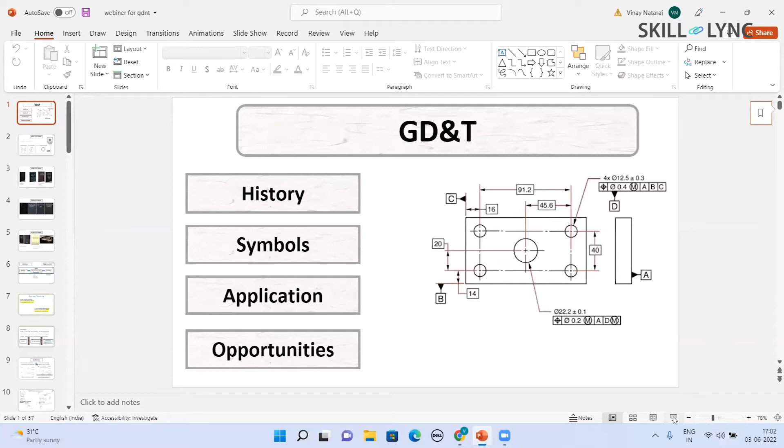Okay, let me just try to share my screen. I hope all of you can see my screen and hear my voice, right? Any issues in the voice, please? Yes, we can see your screen. Yeah. Any voice from the participants? Nope. Okay. So I will try to continue.

Today's session is called GD&T. So here, what we are trying to see is how it has evolved and how important it is, and how basically it is necessary for us to know about what is GD&T in our daily life, professional life as engineers of any field.

Okay. So in the first slide, I would like to mention that we will try to go through the history. History is very important because it gives us the depth of the evolution and the importance of the subject. And then afterwards, we'll try to learn about some of the symbols, and then we'll try to put up the application.

Somebody is telling it's not audible. Is it audible, sir, now? So my mic is not on mute. Vinay, you are audible. Yeah.

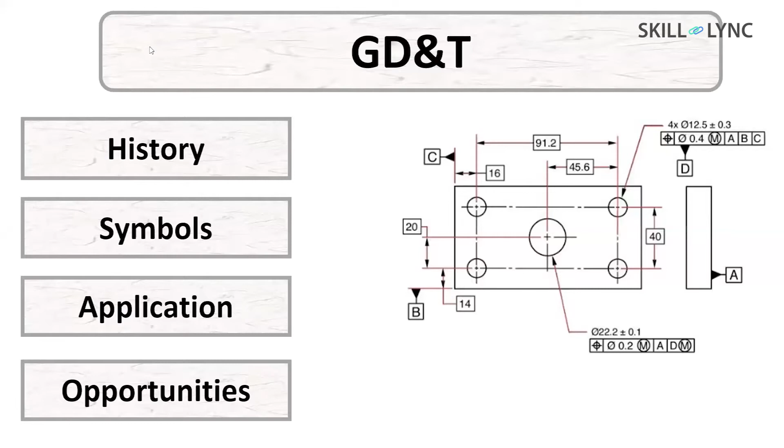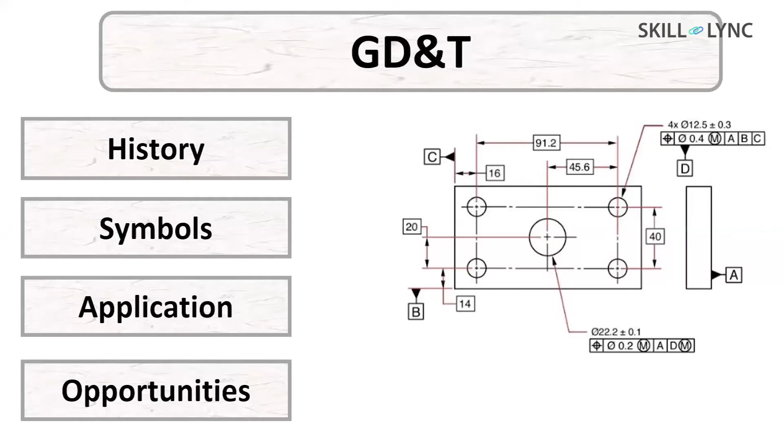Yes. So let's go and know what is GD&T. Let's go into the history first. So way back in 1939, which is when we had the Second World War also, a person named Stanley Parker was known to be responsible for starting off GD&T. He was working in the Royal Naval Torpedo Factory in Scotland in 1939.

So what is this torpedo factory? Torpedo means it is a kind of a missile which can be launched from a submarine or a ship for underwater. It propels itself. At that point of time, war was going on, and he was trying to manufacture lots and lots, in millions, and he had to supply them for every day of use on the battlefield.

But when he tried to manufacture this, and it was getting checked for dimensions and other things, he found that about 30% were rejected, and only 70% was accepted at that point of time. So he was wondering, because whatever is rejected is just sitting on the floor, and there was a huge demand from the war front, and he didn't understand why this is happening, because functionally it was functioning, but it was not acceptable.

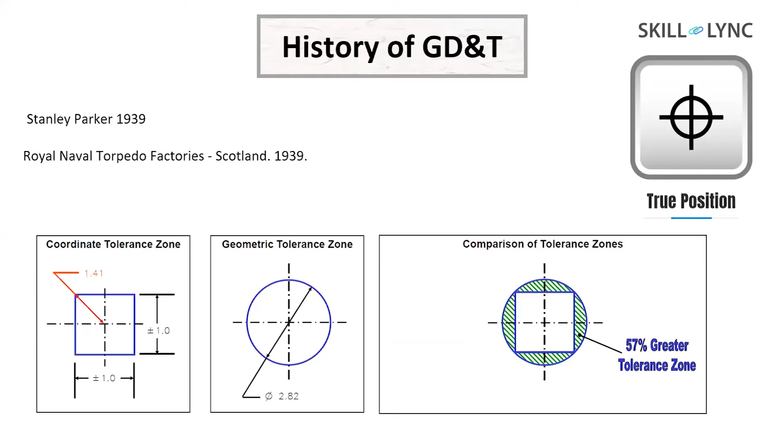So when he tried to analyze some of the geometries and their dimensions, and do some measurements, he found out that the allowable tolerance on the part was using something called a square tolerance zone. Now, what is a square tolerance zone? When you have a rectangle, for example, and you are giving dimensions of length and width, the tolerance zone is from left to right and top to bottom. So it becomes a square.

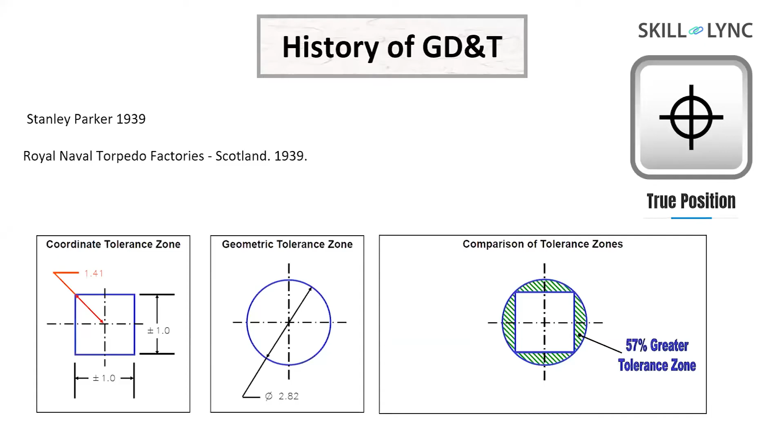He was seeing that a lot of geometry tolerance was on a circular pattern. So he drew a circle over the square tolerance zone, and he found out that 57% more tolerance zone was available, but those parts were rejected. So the true position is one thing which goes with the Stanley Parker name. By this, he could prove that 57% of his rejected products were all functional.

So let us come to the second page. We will learn about the history of GD&T. Way back in 1935, when the military rule was high, the military people were making a lot of defense products. They were trying to write a book of how these things can be drawn on a drawing sheet, what rules to be used so that about 70-80% of the components are acceptable. They merely started with a few of the variables. It was 35 pages long, and only by the military.

So from 1935 onwards, when we come to 1946, what happened in America is that the automobile industry also grew. The domestic transport of vehicles also improved. So at this point of time, the automotive industry also said, hey, look, we also want this GD&T. We also have so many parts manufactured in different parts of the country and the world.

And when they came to be assembled in one place, interchangeability means like you have a nut made in some country, a bolt made in some other country. When you bring it to your country, interchangeability means one part, any part, just picked and assembled, it should assemble. But that was not happening. So that is the main reason why GD&T was growing.

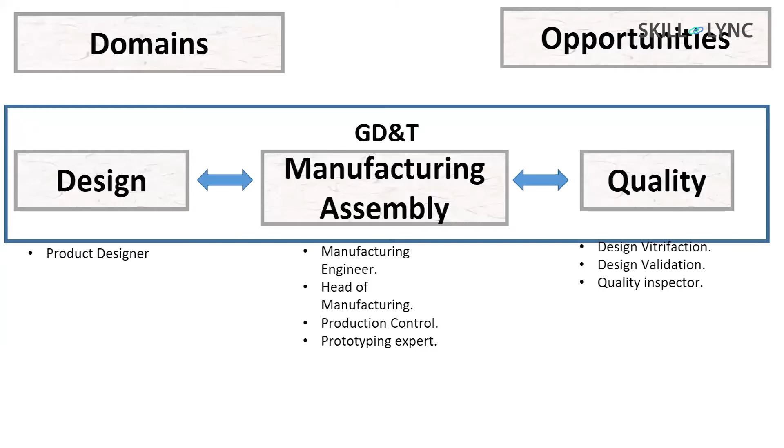Now let us go into a little bit of knowing what GD&T is on a very superficial level, so that it makes some sense.

The next slide is called geometric tolerance. When anybody asks you what is geometrical tolerance, you can find many of these things with handy books and other resources, even on the internet.

So what I have highlighted in yellow, let us keep some concentration on that. Engineering drawing, everybody knows, is an international language. But what is GD&T? Accurately describing a part.

So accurately describing a part. I'll give you one more example. If you want to tell your kid at home what is an apple, if you draw an apple on a page, how it looks, or if you just give an apple itself to his hand, how it looks. So that is the understanding.

You have to accurately define a part. How do I accurately define a part to a child? I just gave an apple to his hand. So when he sees an apple in his hand, it is accurately defined. The child will not make the mistake of confusing another apple with an orange. But if it is done on a drawing, a plain sketch, it might sometimes just say okay, looks like an apple, something like that.

Now coming to the next thing, it is a philosophy. It is a philosophy means what? Just because I know GD&T, I don't have to really put everything everywhere. So it is a philosophy.

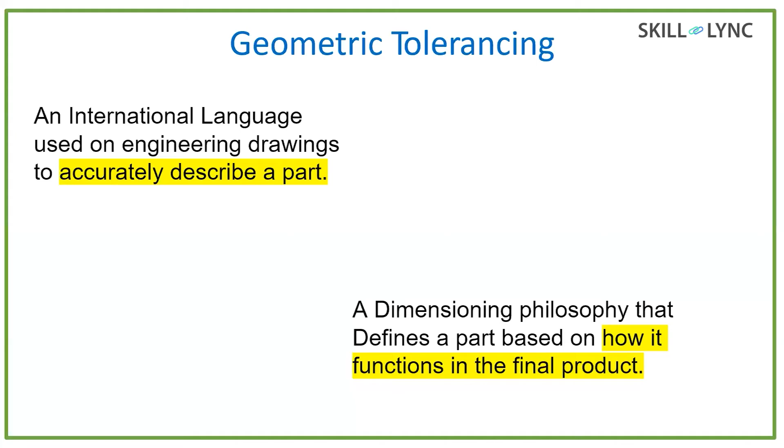For example, if you take a pen, the cap and the body may be very well designed, very attractive, everything. But if the cap does not fit or does not stay in place when it is closed, then the pen, however well designed, may not do its function. So the function of the cap is to retain onto the pen. That's what I want to say.

Let us continue a little bit. This is what you should remember: GD&T is more than just symbols. It is not just symbols. It is a kind of a communication.

It is a kind of communication which you give, a kind of technical communication on the drawing. What is the flow? It flows from design to manufacturing, and manufacturing to how it has to be inspected.

So when you see that, in a normal scenario, we always have barriers between the design department, manufacturing, and inspection department. We always have barriers where they are confused, or they don't understand, or they don't inspect properly, which will require a lot of cost.

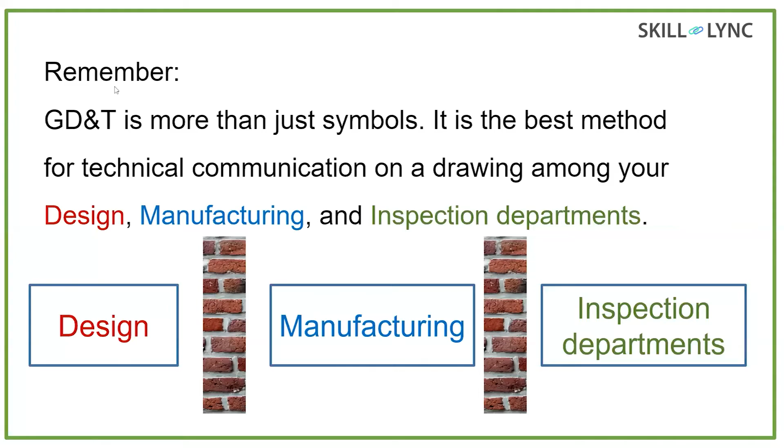If it is in the design phase, you will have X amount of cost. If it's in the manufacturing phase, it is X10 cost. And if it's rejected by inspection, it is 100% cost loss because you have already manufactured it. So that's what I wanted to tell.

Now let us go to one more slide just to give you a superficial understanding. There is something called general dimension and tolerance. This is what we have been using all these days in our engineering, diploma, ITI, everywhere — we always give dimensions to all the parts, and say, look, my part is fully dimensioned.

So what happens with general dimension and tolerance? It controls the size of the part. What do you mean by controls the size of the part? If I want a shaft of 10 dia with 100 mm length, yes, I have it in my hand. But what does geometrical dimension and tolerance control? It controls the shape of the part.

I have a cylinder which has got a diameter of 20 and a length of 100. Good. But now the cylinder is bent. It is not straight, it is now bent. So according to the general dimension, it is okay. But it is bent, it does not serve my purpose. So now the GD&T will control what is known as the shape.

So let us run through some of the cases, what mistakes I made when I was in manufacturing. In case number 1, I just gave 20 dia, 20 dia. I wanted a shaft going into a hole. I said 20 dia of the shaft, 20 dia of the hole.

So when I got it, I said, I want 10 pieces of this. The manufacturing guy manufactured and gave it to me. And when I tested using some instruments, it was always 20-20, but it never went inside. Because in certain cases, the hole was small and the shaft was big. Or the shaft was small and the hole was big. There was variation. So I thought, okay, then there is something wrong.

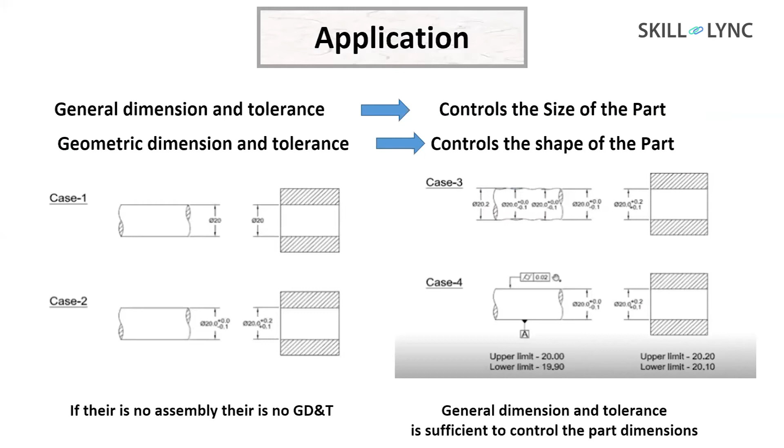So the next point is what we normally call MMC and LMC, which is very clearly and nicely explained in our courses: maximum material condition and least material condition. Maximum material condition means what? The material is still there for you to repair or do any correction. If you are going off too much, you can make a bit of repair in certain areas. So that is called maximum material condition.

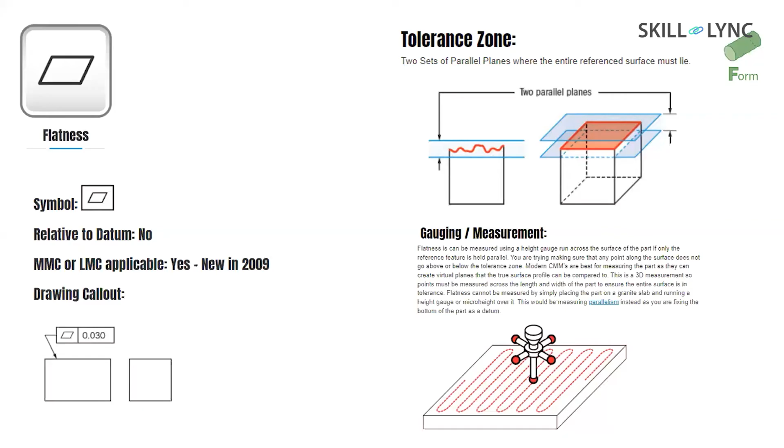So next is flatness. Straightness was for a single line; flatness is throughout the surface. Same thing here: how it is called out on the drawing, what it means, and how it is measured. When the designer puts it on the drawing, how does the manufacturing guy look at it? It's on that diagram. How the inspection guy inspects and tells you that whatever you have done is right is on the right hand side.

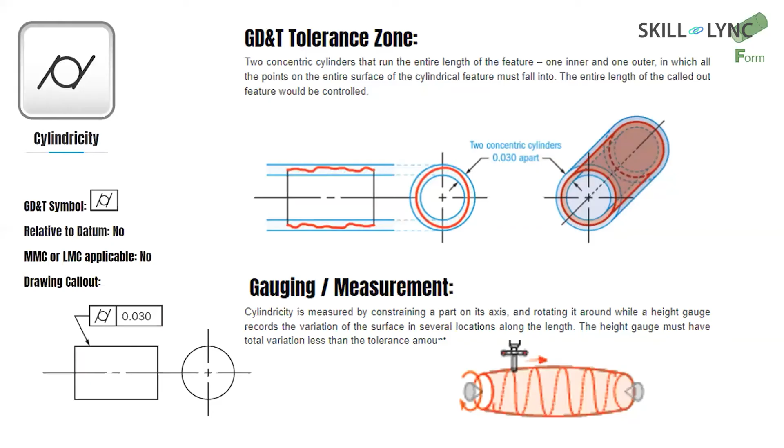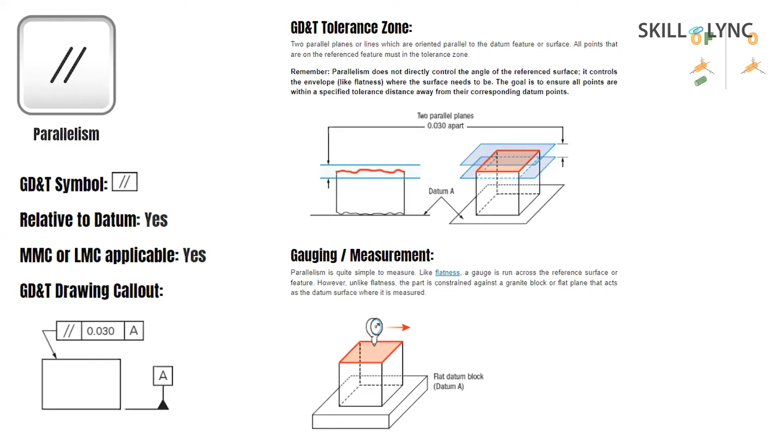Then we have parallelism. Now here, one change you can see is that it is relative to a datum. Parallelism is always measured with respect to a surface. On the bottom right, you see flat datum block A: the block you want to measure is kept on a surface table. That means you are generating the datum first, and then measuring it. Same way, for perpendicularity you also need a datum; this is how it is measured.

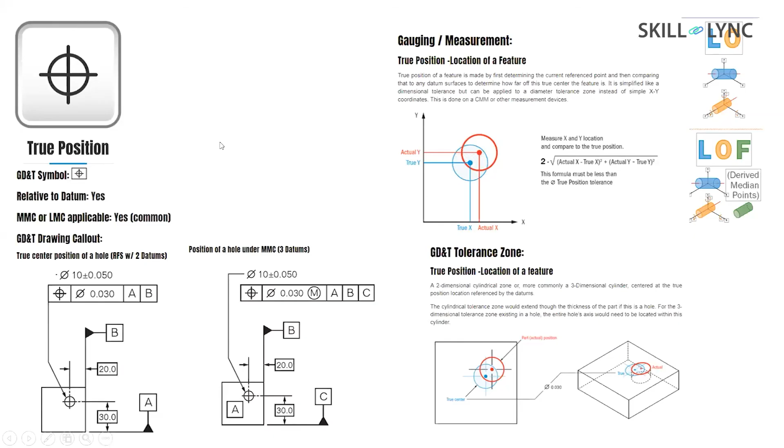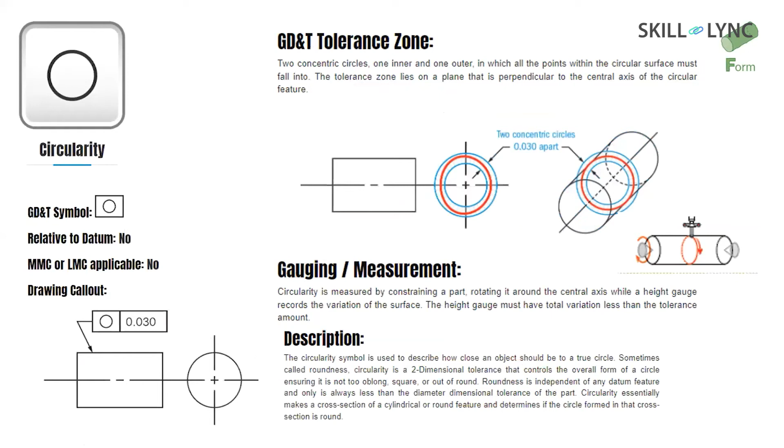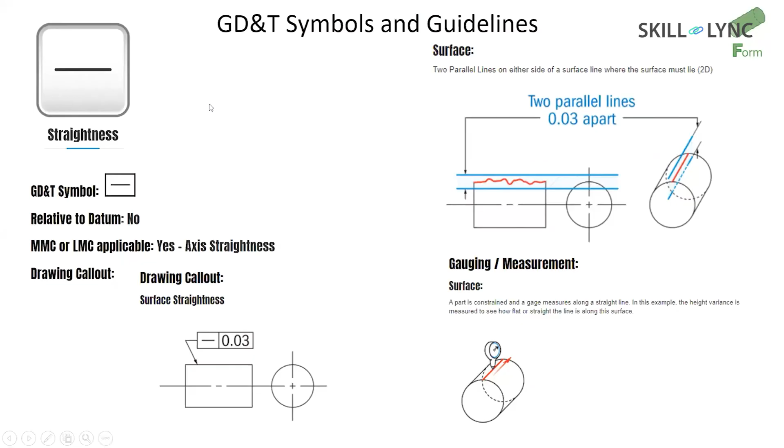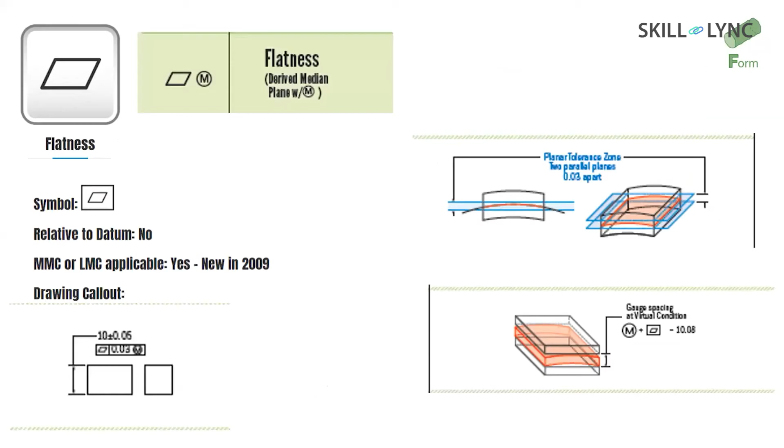I don't know about the sound quality. My mic is at full volume. I am also shouting in a room, but yeah, I am talking very slowly also so that people understand. So we'll take the questions a little later.

Okay, so angularity is one thing.

Put my mic very close.

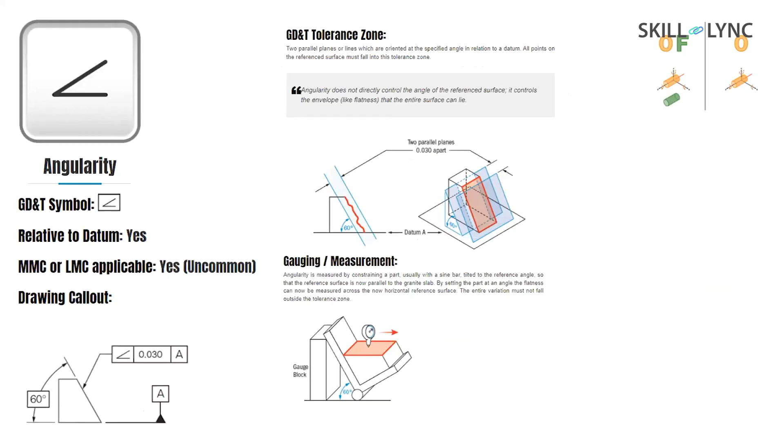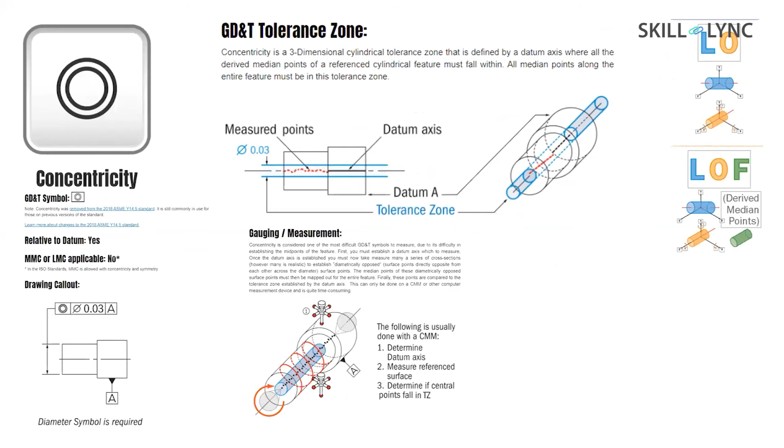So I'm just trying to run through this, because this is where I want to make sure how you read it, what it means, how it is used, where it is used, how it is applied. All this will be told to you in great detail. So after finishing these symbols, I just gave you a glance. I never explained each and everything, but I just told you how you should interpret and read. After this, we have got two examples, some basic examples, just to tell you how it is.

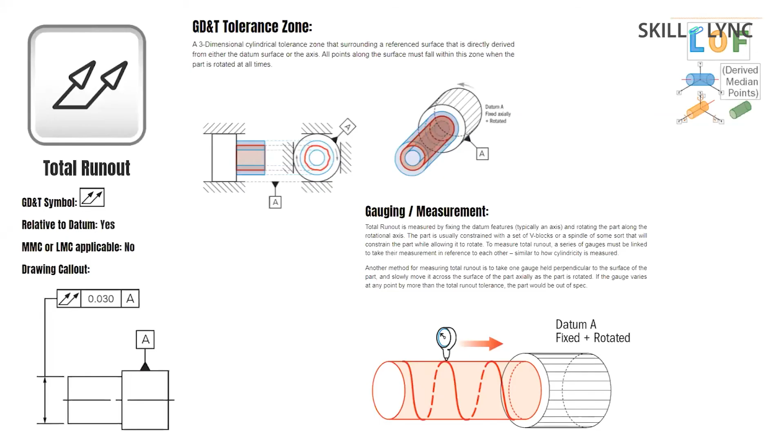Okay, the first example is very simple. The example is in front of you. It's a flange. This is a drawing which I have done; I know a little bit of manufacturing and a little bit of drawing, and I'm trying to put it across to the next stage. So from left to right, we just observe. The first thing we should check in a drawing is that all the dimensions are there. If you see here, there are some dimensions missing. Missing dimension is the first culprit we have to find. That's why I am not ready to give this drawing to the next stage.

A missing dimension could be that I have not designed it, or not thought about it, or not seen the legacy part and transferred it. So many things are there. So this is one of the dimensions missing here, so I have given it as dia 64. Then, this is very important. When we see this drawing, what is understood is that this is a center line and there are 4 holes. By default, I will assume these 4 holes are 360 divided by 4, 90 degrees apart. This is what we normally assume.

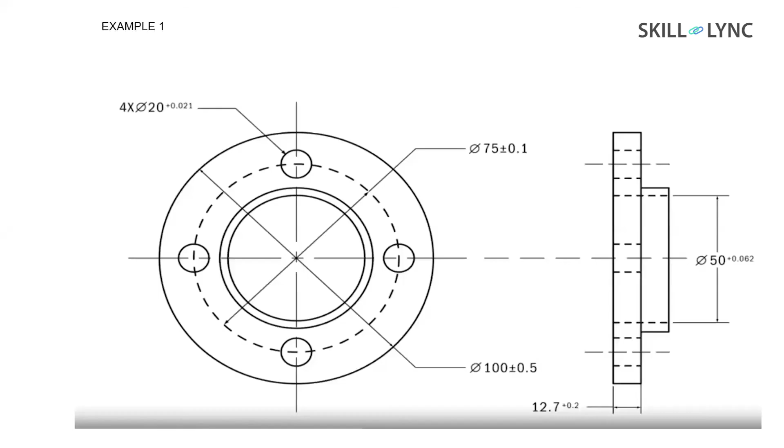So what GD&T tells us: don't assume. There is no gap for assumption. GD&T tells me you have to give a 90 degree angle. You have to say 4 into 90 degrees plus or minus 5 degrees. So it is at 90 degrees, and the manufacturer also knows that if I'm out by 5 degrees here and there, the part is still accepted. So it is a win-win situation and understanding.

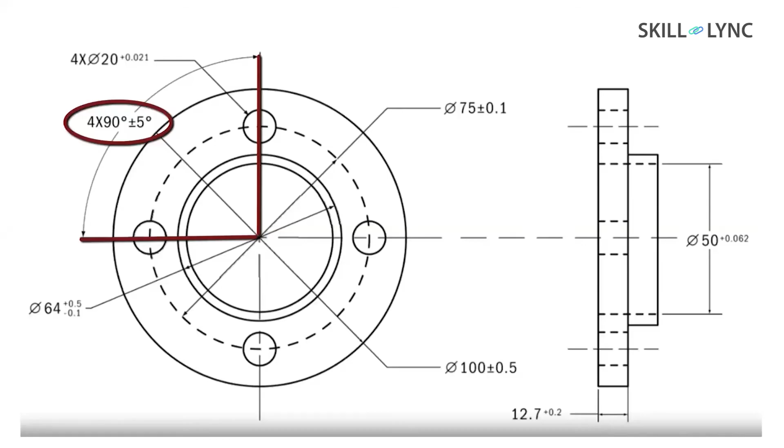Okay, so you said it is 90 degrees, and it is 89 point something, you can take it. The manufacturing will tell. But now it is very clear: 90 degrees plus or minus 5 degrees, 95 or 85. I don't want 84. I don't want 96. Okay.

So now the bottom 2 dimensions were missing. So I put a dimensioning method known as chain dimension. What is a chain dimension? One dimension follows the previous dimension. So 12.7 is there, and if I put one more dimension, 12.3, the 12.3 follows the 12.7. That becomes a chain way of dimensioning. In the drawing classes, you have understood what chain dimensioning is.

So what happens when we do chain dimensioning? The 0.2 and 0.05 tolerances get accumulated because they're in one straight line. So 0.05 plus 0.2, the overall 0.25 can be accepted sometimes. That means there is a tolerance stack up. Tolerance stack up is another concept you will also be learning in our course.

So stack up means what? One above the other. So one above the other. In a bracket, we want to set up 10 parts. When we assemble, only 9 are going, the 10th one is not going. Why is it not going? Because all the 9 have tolerances which have been building up.

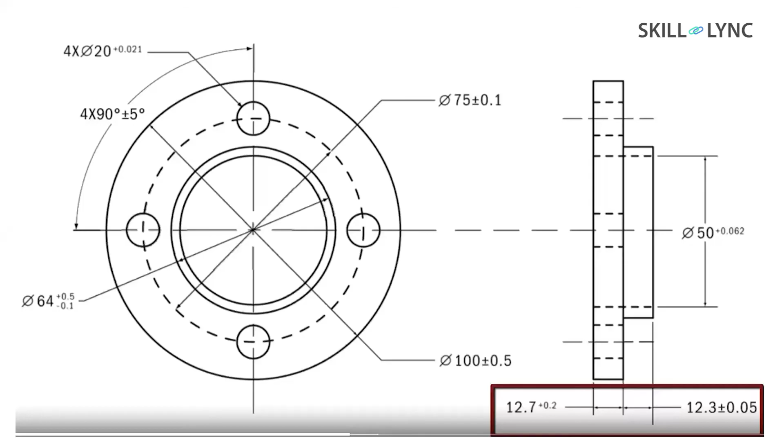Okay. So to avoid that, it is recommended that we give what is known as single reference dimension like this. Here it is not accumulated. So going ahead with this one. So are we done now? We have given all dimensions, sir. Everything you said, 90 degree, everything is given. We are done. Let us just give it to the shop floor.

Okay. So let us see if it is done or something is really missing. Yes. What is really missing is we have not defined the center of all the holes. See, there are so many circles here. How are we sure that all the centers are lying? Sir, we can see in the drawing, no, sir. All the centers are center.

No. When they manufacture it, they will not come to the center. They will always be left, right, because all the operations are not done in a single phase. Some of them are done in lathe, some of them are done in milling machine, some of them are done in drilling machines. So whatever is cost effective, they do it. So when they do that, and if they have not selected the proper sequence as told by the GD&T.

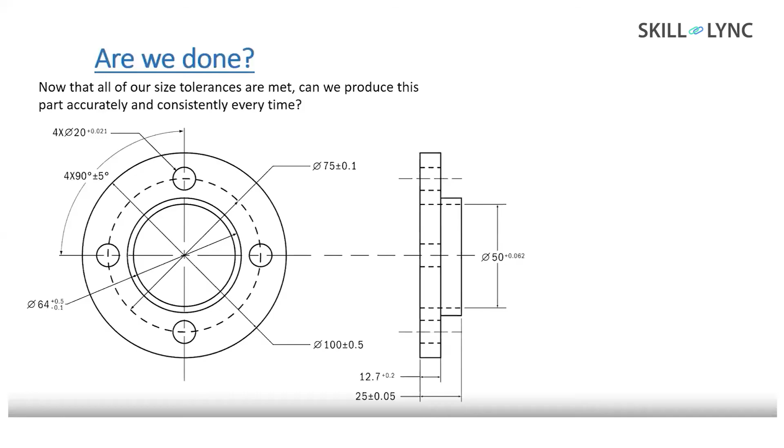Now GD&T is not here, so I can do my own thing. I can do this drilling first, then turning, then whatever it is, depending on my use. Then what happens? The center will not be at the center. The center will get shifted like this. So when the center gets shifted, what happens? You might get a job which is like this. So in this one, if the center shaft is going, only 3 holes are going, the 4th one is stuck. I'm not able to put the bolt, something like that.

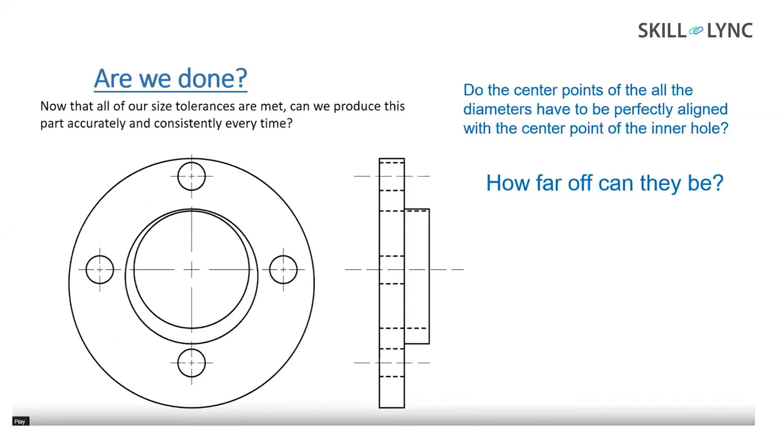So now that means center lines and center points do not have tolerance by themselves. They are only indicators. They don't have tolerances unless you provide it on the geometry. Every feature of size must be located. What is feature of size? If it is a circle or a square or rectangle, whatever you do on your CAD or on your machine, it's called a feature. It should be located. Located means what? It should be positioned. Now we are not talking about the size, but location.

But we should also remember that tolerance is only required for function. If it is not required, you should not tighten it. Sir, I gave 1 micron, sir, he is not able to do it. There is no facility to do 1 micron, or if it is there also, it is a huge cost, right? So you should not do that also. So depending on the function, you can do it.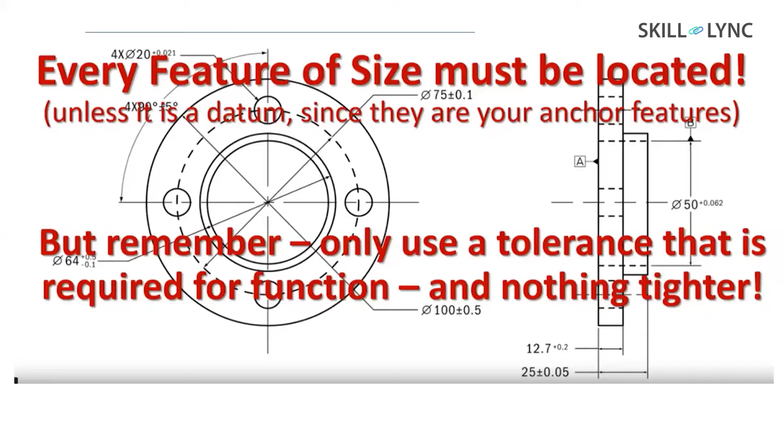You can have a question: sir, I don't have experience, how do I do this tolerancing? In any industry, if you go, you will always have what is known as general good manufacturing practices. They will have a document, good manufacturing practices. In that, they will have given you some rules and regulations, how to start, and then you have your own requirements.

Now I am putting the center dimension, dia 64. I'm telling that there is a cylindrical position tolerance of 0.2. That means the center has a cylinder. Within that cylinder of 0.2 only, the center axis can move. With respect to what? He wants it with respect to B. B is the internal hole. So the outer hole should be in line with the internal hole. By this, even the wall thickness is also maintained properly.

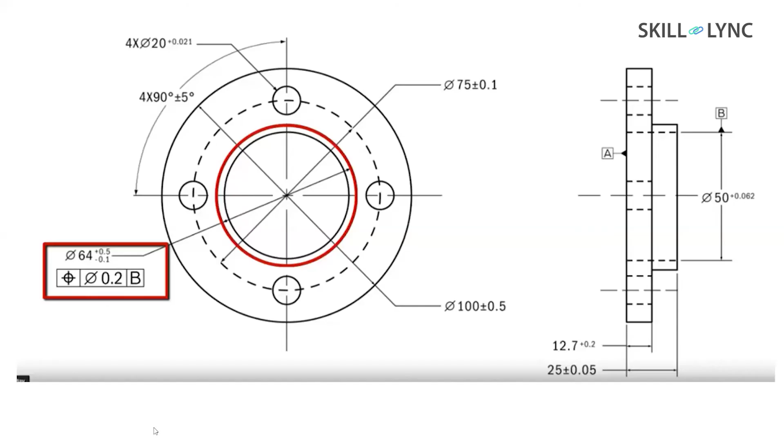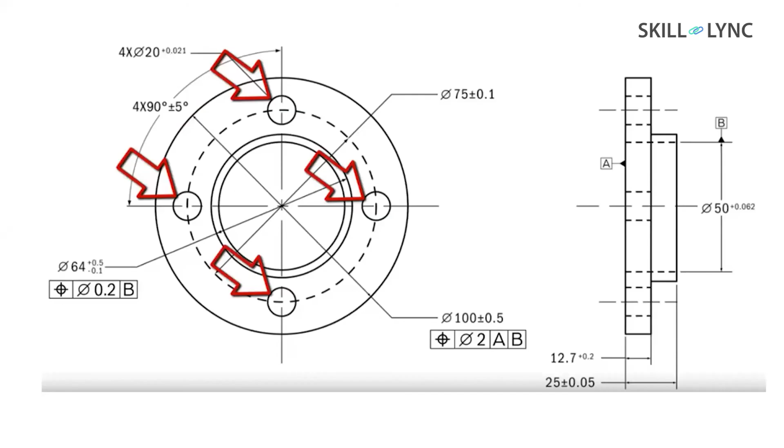Same way, we should also arrest the centers of the small holes, by putting required geometrical positionings and defining the datums. Okay. So briefly, I will tell you what we should do stepwise. See here, 4 into 90 plus or minus 5 we have given. There is already a deviation of 5 angle, and then we are also giving a position of 0.1.

So sometimes it becomes very rigid. So what we do is, we say that 90 you can maintain as in the square bracket. When you put it in a square bracket, what does it mean? That means that unit will not have any tolerance, or it will follow the general tolerance mentioned in the bottom of the drawing. And above that, 0.1 will be governing.

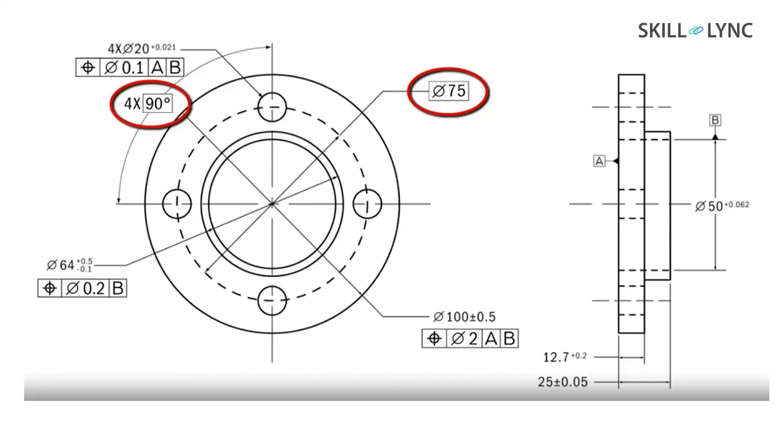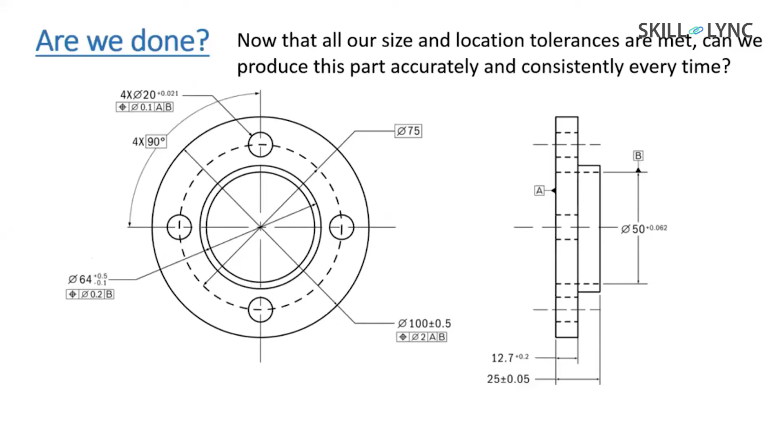So once we are done with that, sir, we have given everything, no problem. Let us give it to the manufacturing guy. Are we ready? Are we done? So let's look at the other side. Are we done or not? If you are done, we'll see yes or no. If it is not done, what is that? Sometimes we have to redefine the orientation properly. Okay.

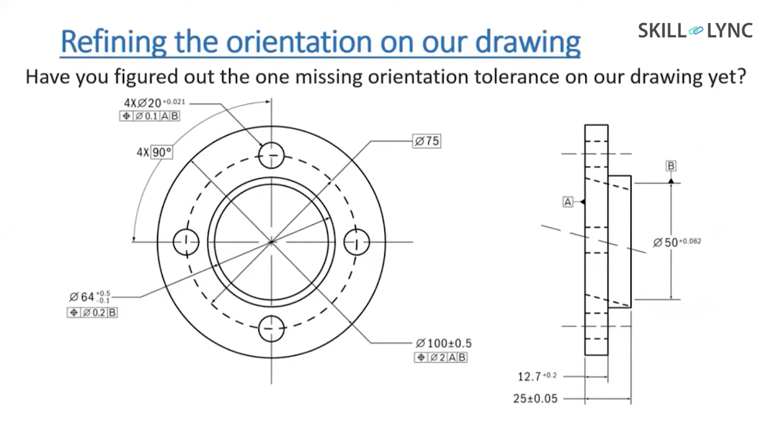So we thought, okay, everything is done here. We can give it to manufacturing. But the thing is, when it is manufactured, we have forgotten about the orientation of this axis. This orientation. See, the axis can be tilted, but it can be within the cylinder, right? So the orientation of the axis we have forgotten. Once you forget the orientation, what will happen? Your part will be all correct here, but if you look at the orientation of the single circle, it will be out.

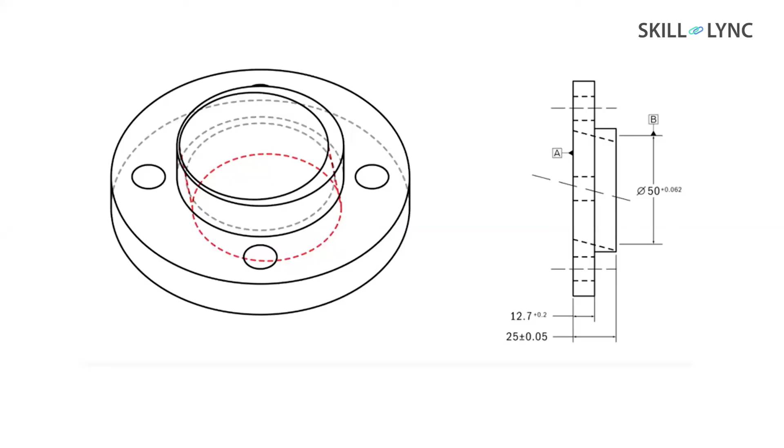That means the wall thickness is not maintained, and the wall thickness will be an area where it will be stressed more, so it becomes a weak point. Functionally, again, it will affect it; if it's a coupling, you may not see it immediately when it revolves or for a certain period of time. Then you will see, okay, no, this is going somewhere else. It's failing. So here what he has done, he has put a perpendicular symbol, telling that this perpendicular symbol is given to the dimensions. The axis should be perpendicular.

So if you have done this, okay, now we are great. We have done everything and we are giving it. It will be manufactured superbly. The only last thing we are going to refine is, since A is the primary datum and we want datum A to be perfectly fine, we have not defined it. So he will say, okay, you want datum A? We will do it in a milling machine, which is rough. But you are thinking in your mind that this will be milled and then it will be ground, within the tolerance of 0.01. Grinding tolerance can be maintained at 15 microns. You will think that. But the person who is doing this will do milling and then keep it.

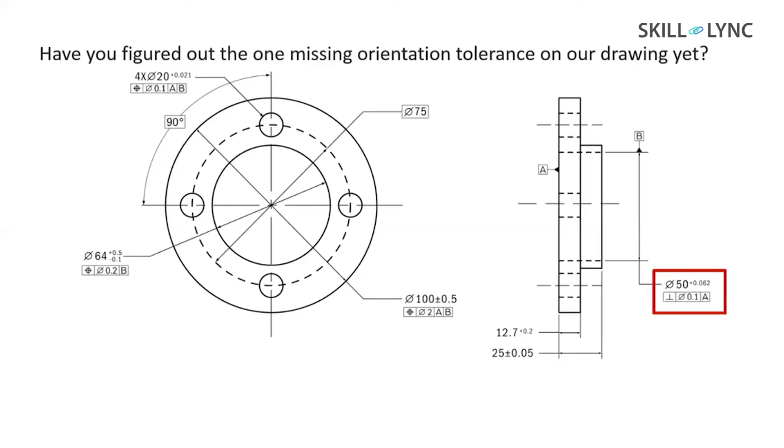So what will happen? Your datum surface will be wavy. When it is wavy, it might give faulty dimensions when the inspection people are checking it, and they might reject this part. So for this part, finally, we are going to give a flatness, saying yes, I want this to be flat. Now, when I say 0.05, the manufacturing guy will think this can only be achieved by grinding, so I will do the grinding on that first. Okay. So this is one of the examples. I'm giving it step by step to give an insight into how it is. Your learning curve will also be like this, and the course is designed on real-time experiences and challenges and will take you through them.

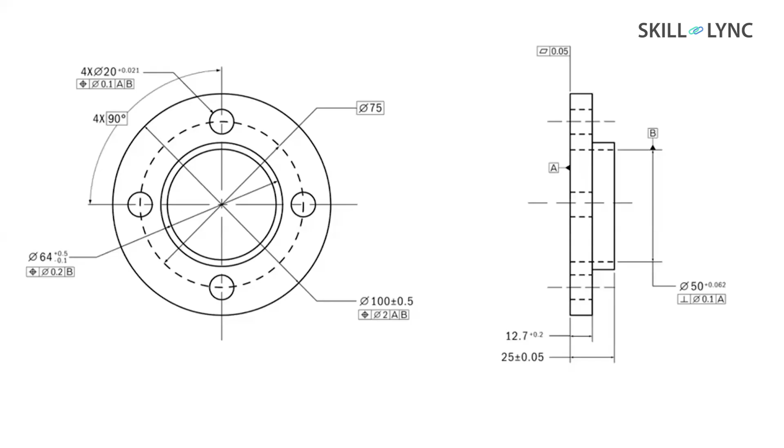So before going into your questions, I have one more very small example. Okay, let's go to that, and we'll have some points here. Every feature on a drawing must have size. You know what the size is? It is the diameter and length. And location means the center point should be in the center. Orientation means what? It is not tilted. It is perpendicular. And the form is what? Is it straight? Is it not wavy? Is it in a curved shape like that?

So GD&T is the basic rule which controls these four: SLOF, size, location, orientation, and form. When all these are given, there is no confusion, and the manufacturing people will take extra care. And these are given only for functional areas. You should not give it for everything. If you give it for everything, it can be achieved, but the cost will be more. Functional areas. So ASME Y14.5 is the standard which governs this.

Okay, location is a must, and it is commonly missed. Okay, so there are primary datums and all that. Form stability of the primary datum is very important. The primary datum will always give stability to the other datums. That means the primary datum is established first, meaning the job is kept on the table on that surface, and it gives stability to all other measuring datums.

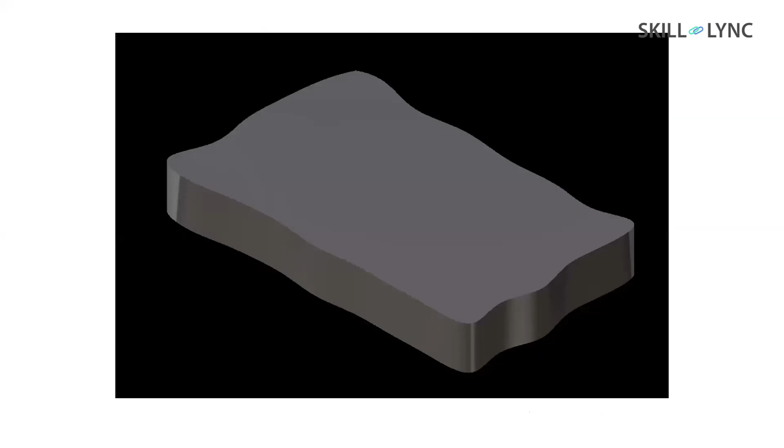This is a raw material which looks like this. Then the datum A is machined first because it is A. And we go to datum B, which is the front side I told you - we machine that and generate it.

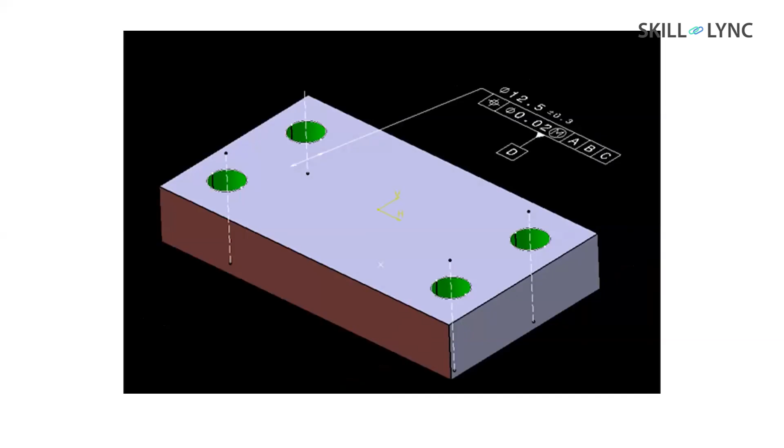Then we see datum C, datum C, we are going to generate. Then we do the smaller hole. And then with the reference of the smaller hole, we go to the center hole. So I think you got a gist of it.

So what is covered in my topic tonight as a bootcamp - let me iterate before I take some chats here. First thing is it has gone through history, so history tells us how important it is. It is a must for engineers to have this knowledge, it's a must, like drawing. And this, as I told you, is language without grammar versus language with grammar - that's the history. Then we know there are some symbols and other things which you have to learn how to apply.

Then we saw what the conditions are to apply it - it is only for functions, not meant to be given randomly. Like if you are a beginner, you might give it everywhere. If the interview person asks why you have not given GD&T to this, you might say, sir, this is just a bolting point, it doesn't need anything. Because by doing that, you are easing the job for the manufacturing guy and the inspection guy.

Then we saw one example where, step by step, we tried to see - it is an iterative process, right? When you go on checking that this is missing, that is missing. Please remember, interchangeability is the most important word. Why is GD&T applied? GD&T is applied only for assembled parts.

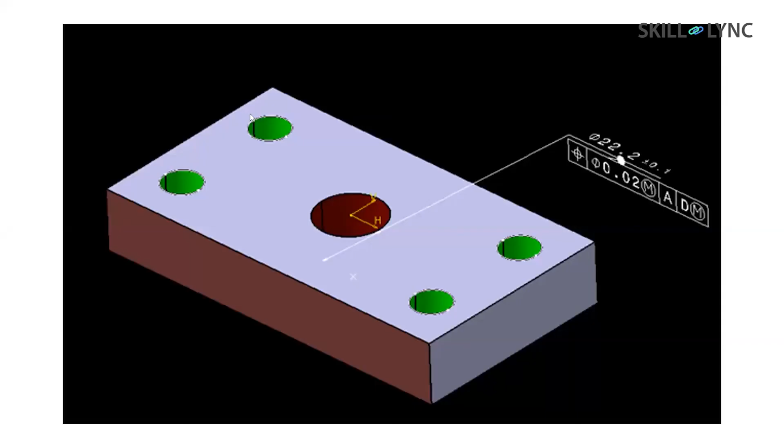So datum D, if somebody was asking me, datum D is nothing but the center axis of the hole. Let me go to the drawing. See, datum D means what? When they say datum D, somebody is asking where is the datum D? It is not a surface or anything. The datum D is connected to the center position, the axis. No sir, datum D is an axis. How do I measure datum D? That is the next question.